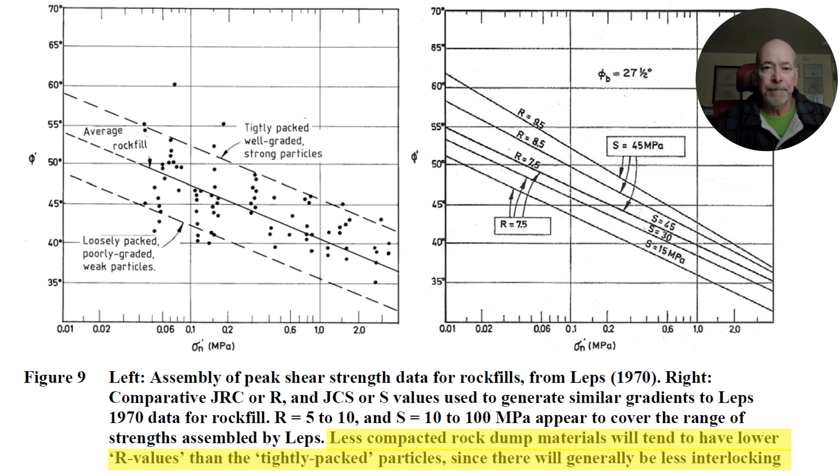But at the bottom, he says less compacted rock dump materials will tend to have lower R values than the tightly packed particles, since there's generally less interlocking. All right. Let's go back to the Leps paper. In the Leps paper, including the closure and discussion, Leps uses the word compaction or some form of it 24 times, and Barton uses it 5 times.

So Leps has a conclusion. He says, in summary, all tests on rockfill specimens indicate that the shearing strength of rockfill varies markedly as a function of normal pressure, being high at low pressures and substantially smaller as normal pressures increase. At normal pressures less than about 10 psi, friction angles in the order of 45 to 60 degrees, with an average of around 50, can be expected when using good quality, clean dumped rock.

If excellent compaction is employed, friction angles in the order of 55 degrees can be expected. Now, there's a couple of keys in there. The first one is that it's rockfill, and he talks about excellent compaction.

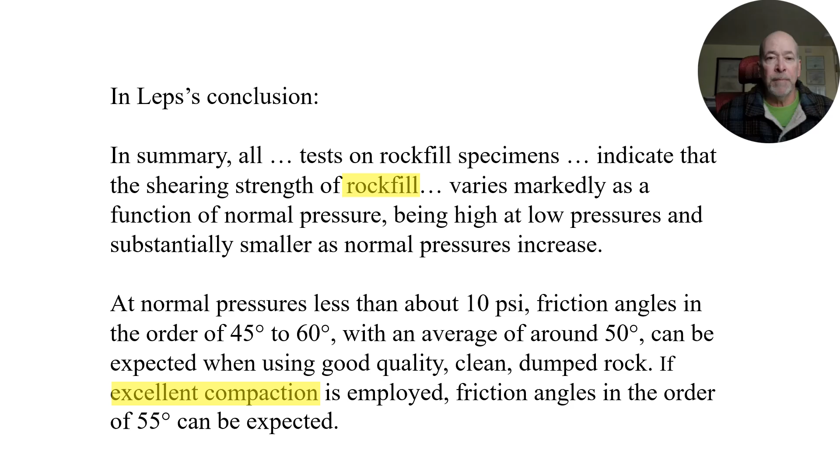Okay, so far that doesn't mean a whole bunch to us yet, because we don't know where in the chart we're going to be, but we've got this chart that plotted several different waste rock types with density versus effective stress and providing void ratio. So let's just add into there, knowing our formula for porosity, and we can put these porosity values into there.

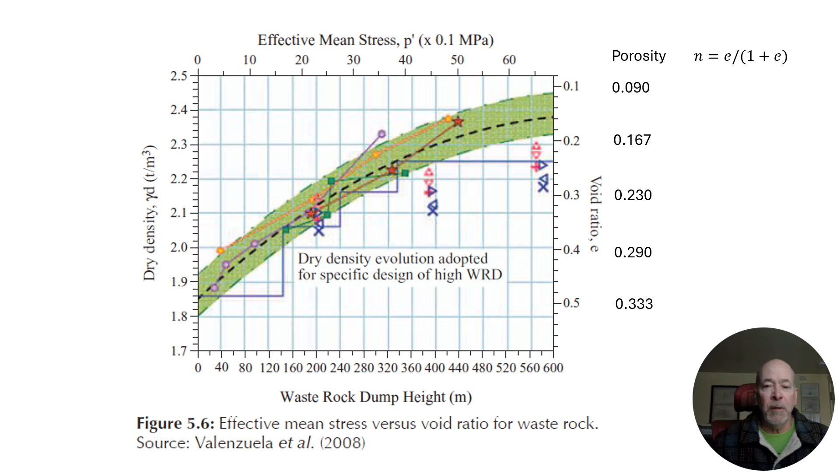So we know that on the loose end, the porosity is somewhere around 0.3, 0.333. So we can chunk that onto this chart over here, and we fall somewhere around here. At the bottom, we've got this formula that Barton gave us for underlying shear strength. And then in there, you can see this R value.

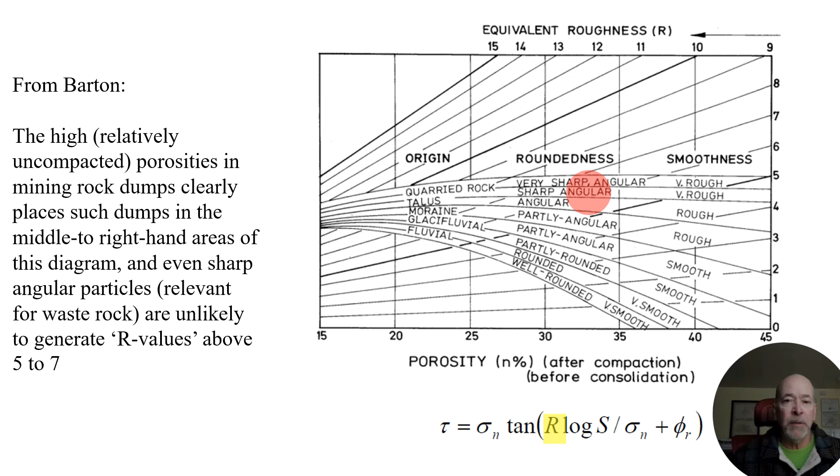So the smaller that R value is, the lower the shear strength is going to be. And here we're talking about some pretty small R values compared to what's on the chart there. So the right-hand side of the chart has got a 5, and that's where that red circle sits. So that gives us a little bit of guidance here.

Let's take a look at this again. So as it says here, unlikely to generate R values above about 5 to 7. So this is the different chart. This is the one that was presented earlier. So let's see what this does to us.

Well, here's an R of 7.5, so it doesn't show us anything down to 5 to 7. But you can see that friction angle on the right-hand side, if we've got some parallel or sub-parallel line to this below there, it's not going to go up to 50 degrees. It's going to be underneath there somewhere. Right.

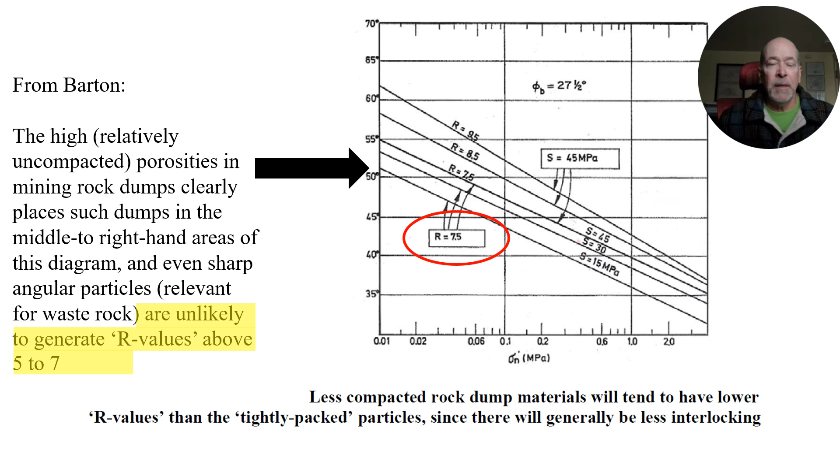And just as I said, under that 50 degrees somewhere. Okay, so let's look at the Corps of Engineers' design and construction for earth and rock fill dams. They give this big statement here. They say that rock fill should not be placed in layers thicker than 24 inches. So we don't do that on heap leach facilities, and very seldom do we do that on a waste rock facility. So those are probably not getting qualified as rock fill.

And here they talk about smooth wheeled vibratory rollers having static weights of 10 to 15 tons. Definitely don't do those on normal waste rock facilities, and certainly not heap leach facilities. USDA in their earth fill and rock fill book, they say rock fill, once placed in the required lift thickness, is best compacted by heavy vibratory compaction equipment.

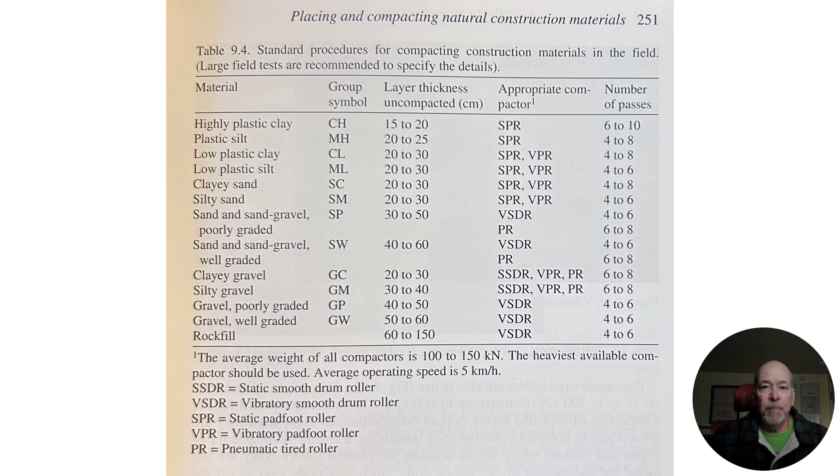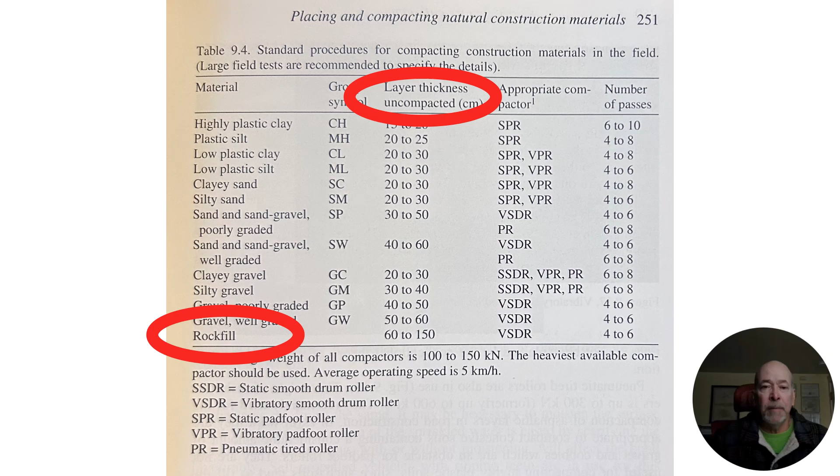Earth and rock fill dams book provides us with this handy dandy table, and up at the top it talks about layer thickness for uncompacted layers. Here we've got actually rock fill, and they say 60 to 150 centimeters, so 0.6 to 1.5 meters. So that's a little bit thicker than we're talking about, but much less than we normally work with in heap leach and waste rock facilities. So those facilities generally don't correspond to rock fill, and that's what Leps has given us information for.

So let's look at this. This is an angle of repose slope on a waste rock pile, and you tell me that that material somehow has, say, a 50-degree friction angle on the outside of the slope. So let's talk about angle of repose and angle of friction. Those two parameters are equal if the loosely packed material is consolidated. So the material on the outside of the slope is not consolidated. So that material on the outside of the slope doesn't correspond to its friction angle, at least not yet.

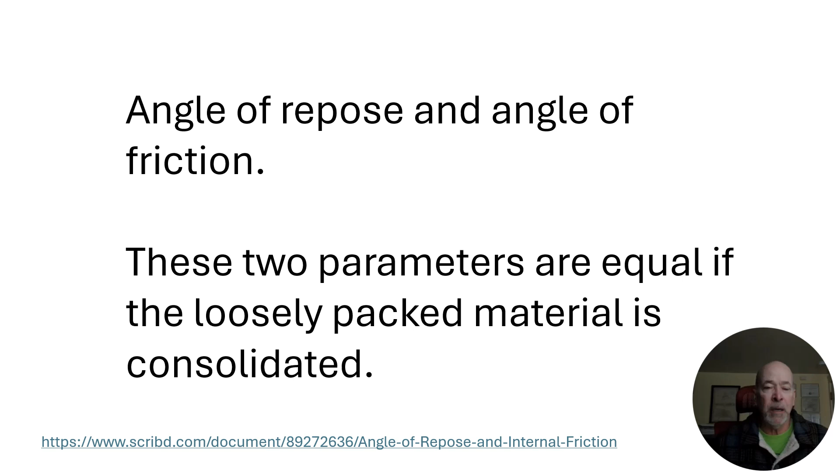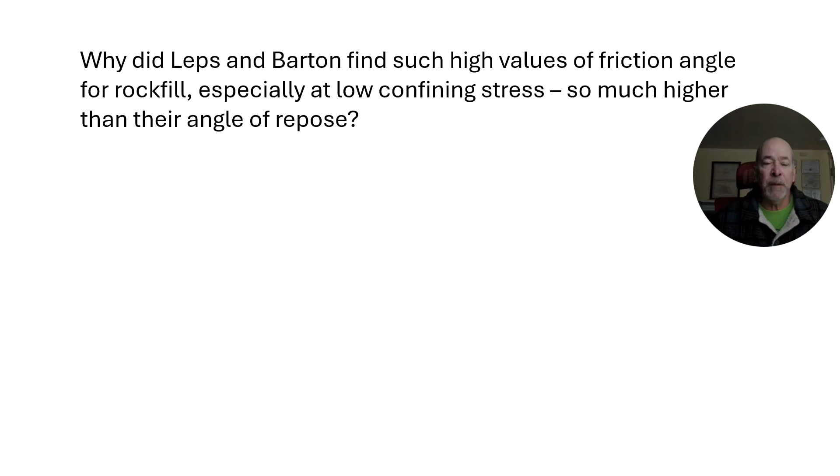So why did Leps and Barton find such high values of friction angle for rock fill, especially at low confining stress, so much higher than their angle of repose? Well, because the rock fill was compacted. So this is pretty complicated to think about. Why do these guys tell you that the friction angle is so much higher than the angle of repose, or what you might get in your triaxial shear test?

Well, the rock fill materials at low effective stress have been compacted in those experiments, and their frictional behavior mimics fill that's at a much higher confining stress. So that's how you get that 50 or 55 degrees at low confining stress, is that it's been compacted as if it's been subject to a much higher confining stress.

And those lines in, say, the Leps chart slope down to the right because as their burial depth increases, effective stress increases eventually to a point where the effects of compaction are no longer evident. So we kind of get back to its normal friction angle, which is close to the angle of repose. So that is a lot to think about.

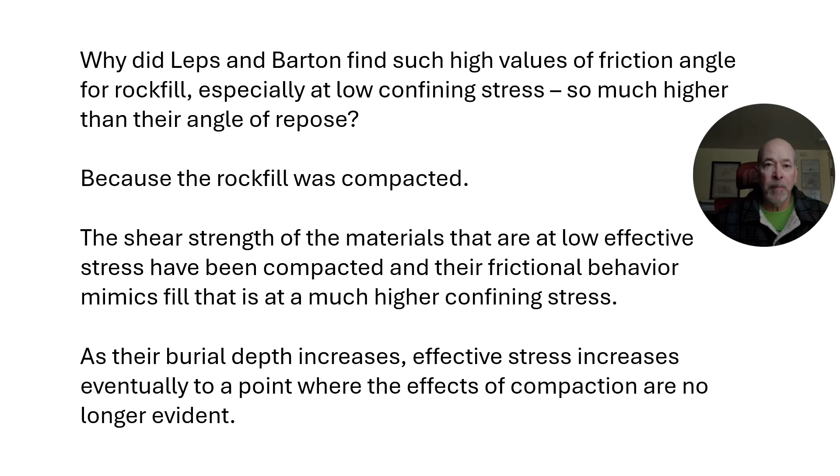Okay, now, should we use Leps for rock fill or for waste rock facilities and heap leach facilities? Probably not without thinking about it really hard. I think it's better to use Barton. He's got some more testing that needs to be done, but it is very useful, and I think it can be put to good use.

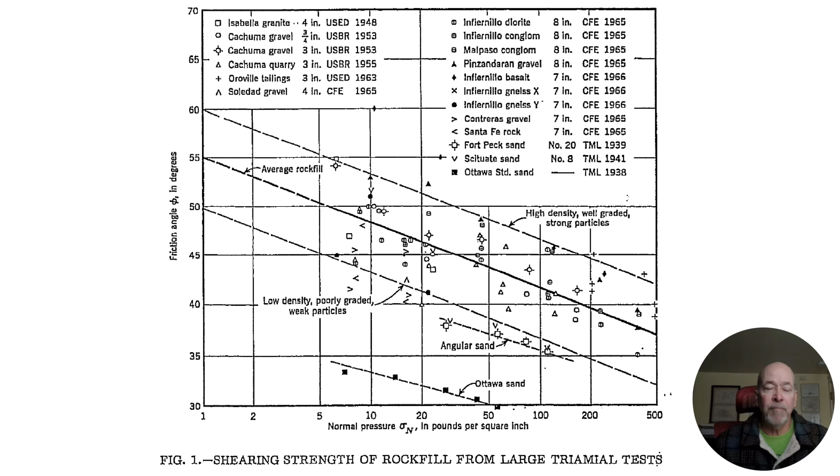So coming back to this chart here, you can see those high friction angles at low confining stress, like we just went through. That's because it's been compacted as if it's been buried very deeply. And that high friction angle disappears as it gets deeper and deeper, so that it goes back to its normal friction angle like you would see close to the angle of repose. Well, that's a lot to think about.

It's been a long video, and this is a good time to end it. Hope this helps people to understand it and appreciate it a little bit more before you just mindlessly go about using Leps for your analyses.